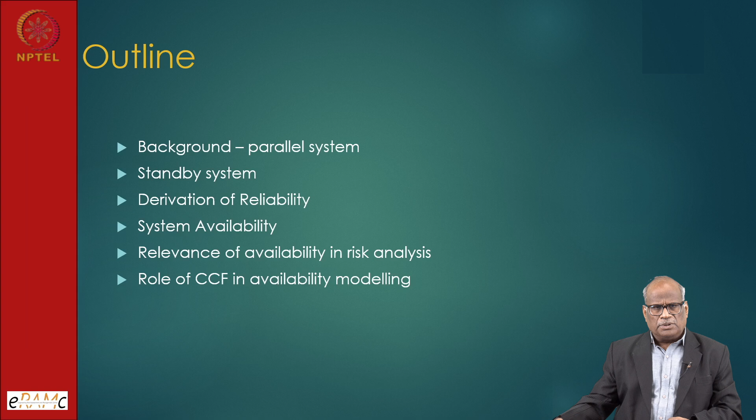Then we have operational availability, uptime, downtime, and the role of common cause failure in modeling this availability. We have seen it earlier also in this configuration. We will try to introduce this concept here also and see how it adversely impacts the system reliability or availability.

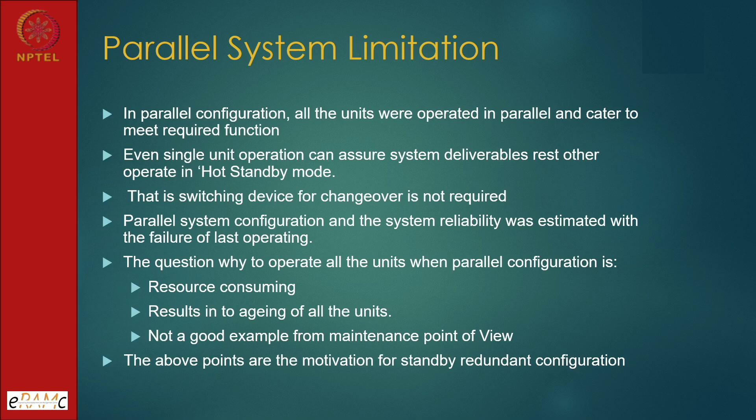So we saw parallel system configuration. All the units were operated in parallel and catered to meet the requirement. Even single unit operation can assure it, because other units are operating in a hot standby mode, and hot standby mode means they are operating, but they are not active in terms of generating the benefit, like a cooling system or anything, and the moment the other operating system fails, these units start meeting the function. So this is called parallel configuration.

But the name of the game is that all the unit failure leads to system failure. And there was no switching device. All the units are operating in parallel. So once the operating unit has failed, the parallel unit is there to meet the function.

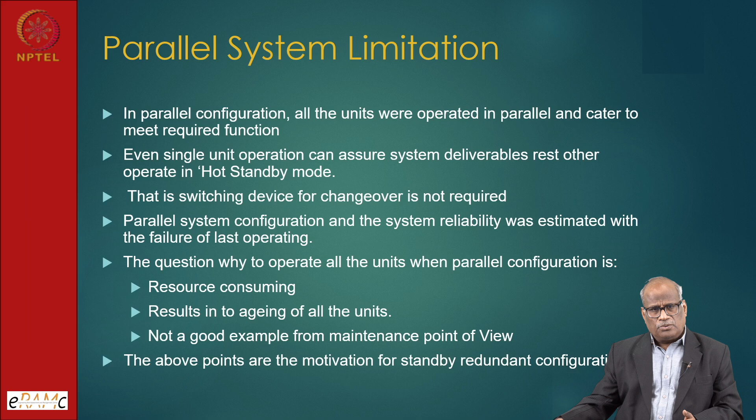But what is the disadvantage with this kind of system? It is resource consuming. You are operating the parallel units in a hot standby mode. It is causing aging of the components also. And it is not a good example from the maintenance point of view, because all the units are operating. So how to do the maintenance? So there is something called standby redundant configuration.

So let's try to understand this whole thing by the example of two pumps which appear to be operating in parallel, but that is not the case. There is a switching system in between. So first let us say pump 1 is operating, and pump 2 remains shut down, unlike parallel systems. When pump 1 fails, the signal goes and the switching system starts pump 2, which then caters to the demand. So this is what the system is.

So you can see this kind of thing is an example of K out of N. There are two pumps, and how many pumps are required for the system to fail or succeed is what it's called. So out of 2, 1 pump is required for success. So K out of N, a 1 out of 2 configuration. When there are higher levels of redundancy, out of 5, if 2 pumps are operating, 2 is K and 5 is N. So these types of systems are called 2 out of 5 configuration.

And then the first component is operating, the other component remains in standby mode. So here we are trying to understand when the system failure occurs. Now at this particular point I would like your attention, because finally in reliability analysis, what is the system failure criteria? That is the governing requirement which decides for what configuration you want to assess a particular hardware or software configuration.

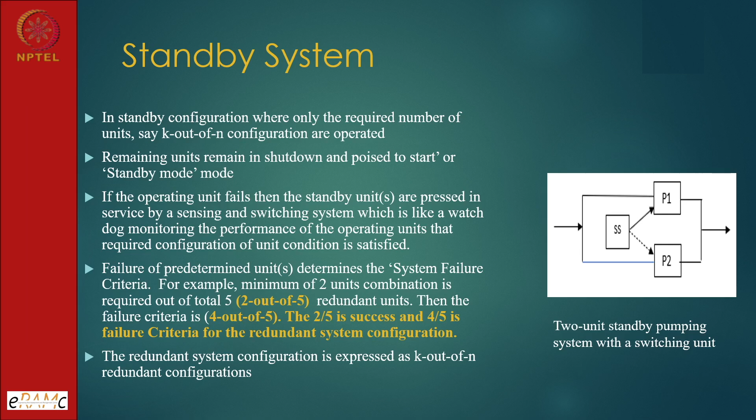Now, if I have to derive a formulation for a standby system, let me take this example. There is a switching system, an input and an output. Pump 1 and pump 2 are there, and failure of both P1 and P2 leads to system failure. The reliability of the 2 unit system is as follows: either the operating pump successfully performs for the mission time, or the first unit fails and the standby unit, not having failed in standby mode, starts successfully with the switching system performing correctly. Minimum 1 unit is required for success.

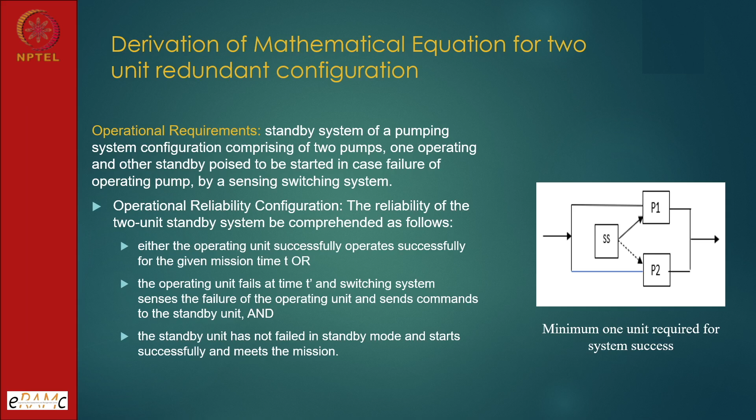Now for this configuration, I have to derive an equation for reliability. P1 and P2 are connected through a switching system, and initially pump 1 was operating at time t equal to 0. Either P1 will meet the mission time requirement, or pump 1 fails and pump 2 takes over, which only happens when P2 was available during standby and the switching system sent the signal to pump 2. This will help us work out the formulation. So let us see the notation.

R1(T) is the reliability of pump 1 for a mission time T. Lambda 1 is the failure rate of pump 1. f1(t) is the probability density function for unit 1. You must remember, the probability density function or failure density function is the basis to describe a distribution in reliability engineering.

Then there is the switching reliability up to time t dash, pump number 2 reliability in standby mode, and R2, the reliability of unit 2 from t dash to t. So this is the configuration. Now let us formulate what we discussed qualitatively.

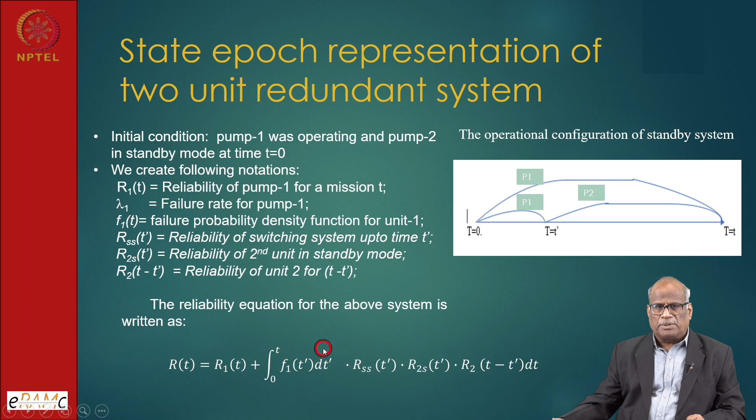Now let us go ahead and see how it looks. Here we assume that it is an exponential distribution. Exponential distribution is simple. We know the expression for reliability for pump 1 is exponential minus lambda 1 t, where lambda 1 is the pump 1 failure rate, and this is the reliability equation for pump number 1, plus, when pump 1 fails, lambda 1 exponential minus lambda 1 t. This is the PDF function for pump 1.

If you integrate, you get the cumulative distribution function, into switching system reliability, into standby system reliability for pump 2, into pump operation for a mission of t minus t' dt'. I think up to here everybody follows. Now the remaining thing is only simplifying the equation and seeing how we can make it simple by putting some parameters, performing the integration and rearranging the function.

So if we do the integration, the first term, pump number 1 reliability, remains the same, plus if we perform the integration we will get this term, and there is a common element 1 minus exponential of all the system failure rates, lambda 1, lambda 2 for pump 2, the switching system, and standby, because they all add up, that will give us this term. So this is the failure probability of this.

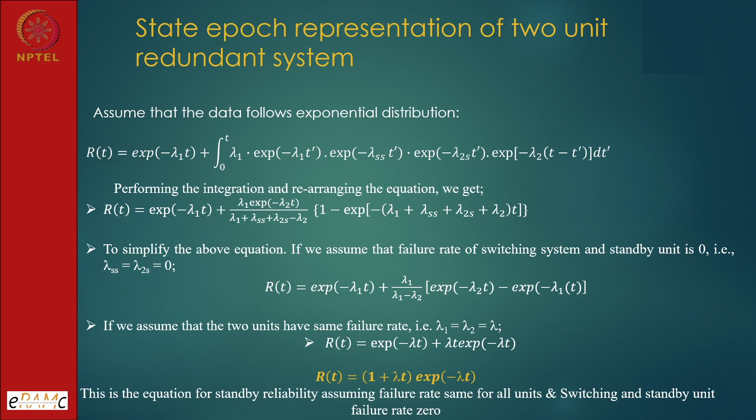So with a different combination also we should be able to solve this equation, but it gives a better understanding of how to account for the switching system, standby pump reliability, and the reliability for the residual period when it has to complete the mission. So we have simplified this equation, but if you write a small computer program, we can factor in the switching system and other things, pumps in their different modes of operation, and get the system reliability for a standby mode.

So though we have solved the equation, as the number of redundant components and their combinations grow, suppose I have 2 out of 9 as the success criteria, then 8 out of 9 will become the failure criteria. This kind of situation we should be able to handle, and when the components are more, the problem will become complex. So now we have compared this standby system with the parallel system, and the arguments for the standby system.

If you look at the common approach in industry, they go for standby system reliability or K out of n configuration. Not that they are compromising safety: failure rates in standby mode are lower compared to operating mode because there is no aging, though there can still be passive failures, but other factors like economics and maintainability come into the picture. In 2 out of n there is better maintainability for a standby system.

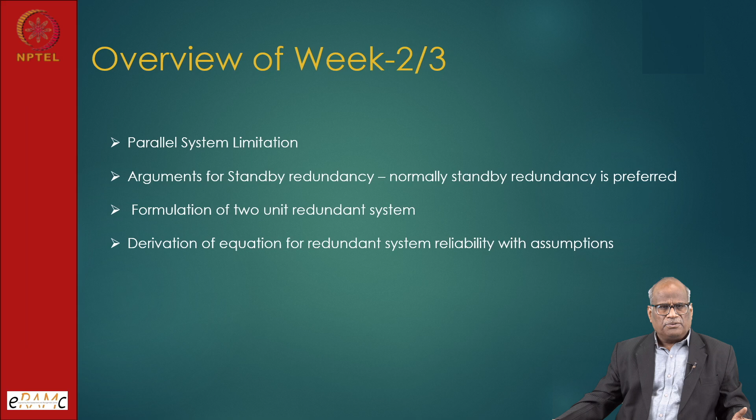You can perform maintenance and make it available, you can check it, and in standby systems often testing is done. This testing provides a model for ensuring the reliability. So that is one reason why standby systems are used, and we have derived the equation for standby system and K out of N system reliability. We considered two pumps. The initial condition was pump 1 operating, pump 2 in shutdown state, to come in based on the switching system demand.